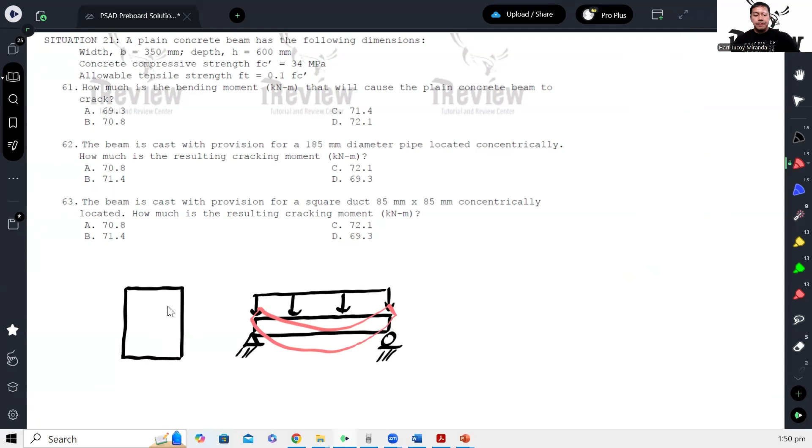Ayan yung tinatawag natin na positive bending. So pag nag-bend yan, ibig sabihin, nasa ilalim is under tension, yung nasa ibabaw is under compression. And knowing concrete to be weak in tension, magkakaroon tayo dito ng tension crack sa ilalim. So ibig sabihin, magkakakrack dito.

At sabi sa problem, para daw malaman natin kung ano yung cracking na yun, may binigay siya na allowable tensile stress ng concrete. So ibig sabihin yung allowable tensile stress dapat ay 0.1 of FC prime, or that is 3.4 megapascal. So kapag yung tension sa concrete ay 3.4 megapascal na, magka-crack na yung ilalim niya.

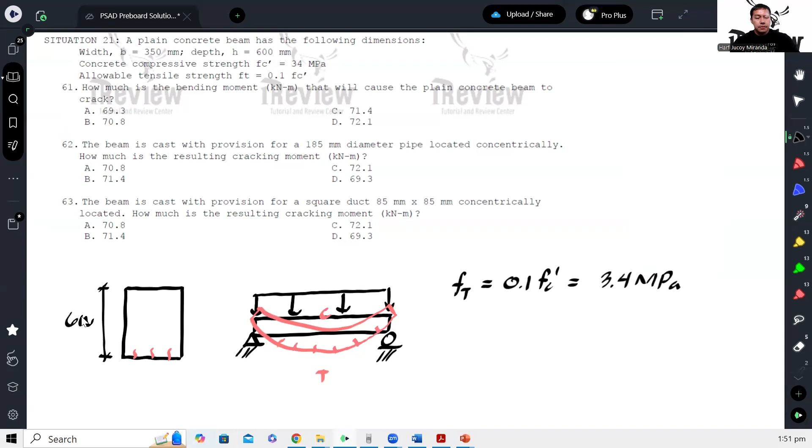And tinatanong lang sa atin, ano yung moment na magpapa-crack sa cross section na to? This is 600 by 350. Okay, so how do you solve that? Well, obviously, etong stress na to will be equal to MC over I. Tapos, ano yung FT? Yun yung 3.4 equals M. Ito tawagin kong MCR, yung tawag natin dyan is cracking moment. And then, yung C natin is basically half lang ng 600

over I. Yung I naman is yung gross moment of inertia, 350 by 600 cube over 12. And then from there, makukompute na natin yung cracking moment. So we have 3.4 times 350 times 600 cube over 12, divided by 300. Tapos divide lang natin to ng 1 million kasi naka-Newton millimeter ito. So we have 71.4 kilonewton meter.

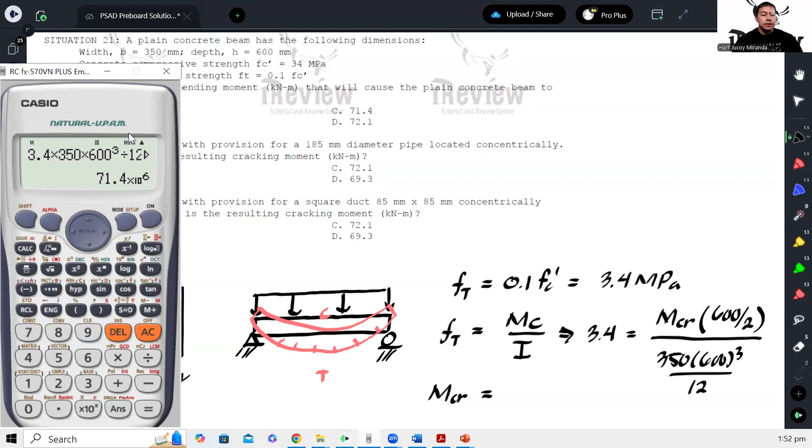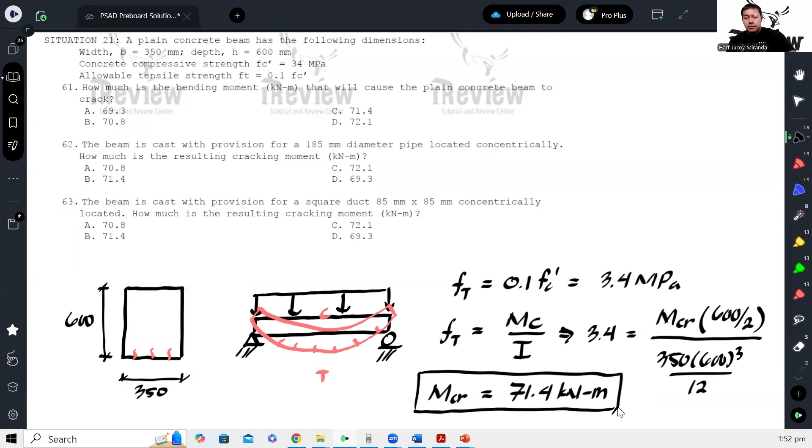So our answer for number 61 is letter C. Next, the beam is cast with provision for a 185 millimeter diameter pipe located concentrically. How much is the resulting cracking moment?

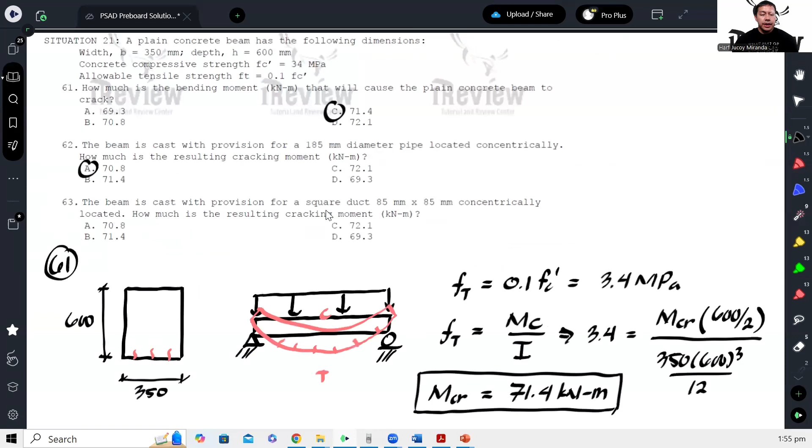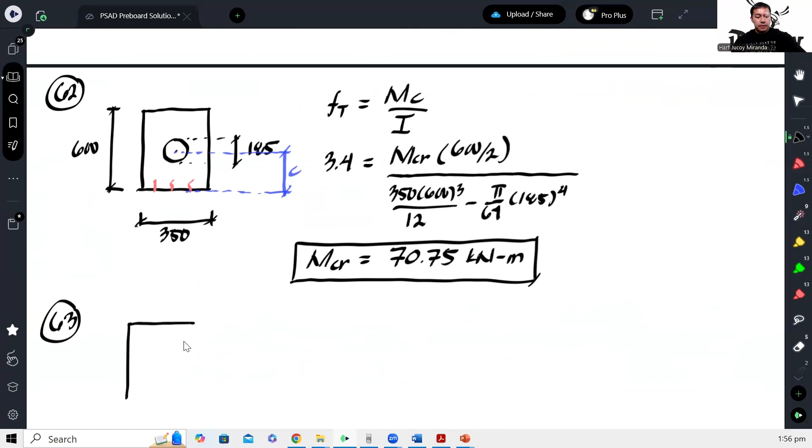So 70.8. And for number 63, the beam is cast with provision for a square duct concentrically located. So ganun pa rin pero square naman. Instead na circle, square naman daw to, na ang dimension is 85 by 85.

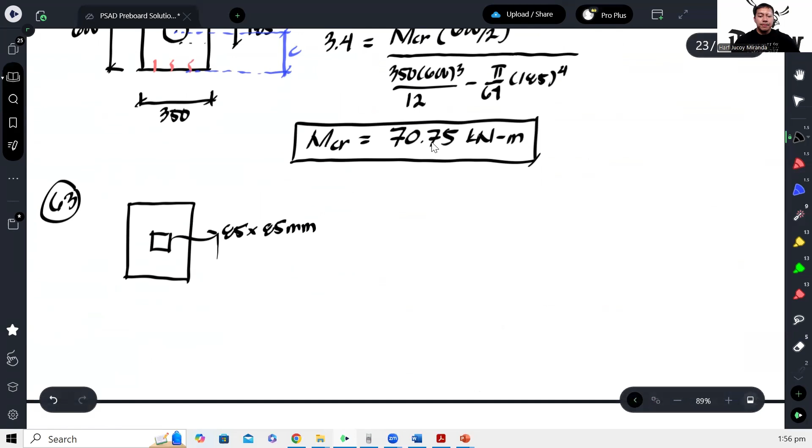So bali ganito pa rin. 3.4 equals cracking moment times 600 over 2. Ang mag-iiba lang ulit yung moment of inertia. So 350 times 600 cube over 12. This time, ang ibabawas natin yung moment of inertia ng rectangle, which is 85 times 85 cube, or to the fourth na lang, over 12.

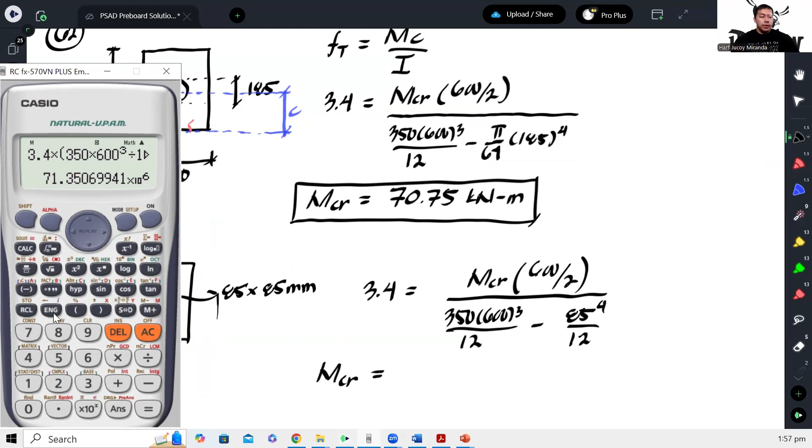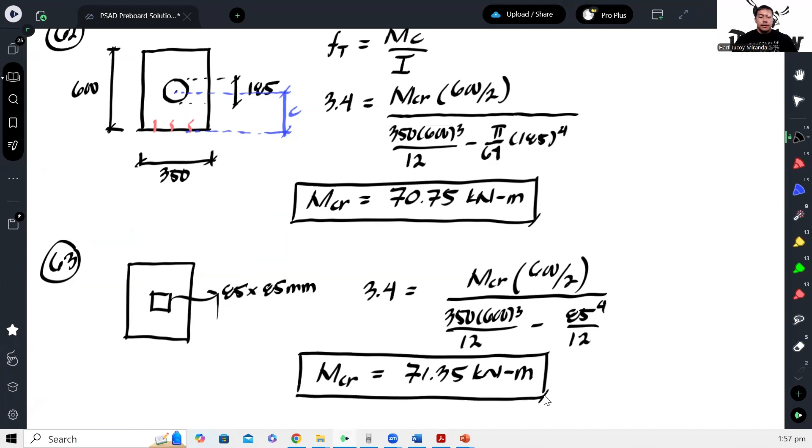And the cracking moment will be, baguhin lang natin to, 85 to the fourth over 12. The rest is the same. So this will give me 71.35 kilonewton meter. So therefore, our answer here would be 71.4. So that's it for this problem.